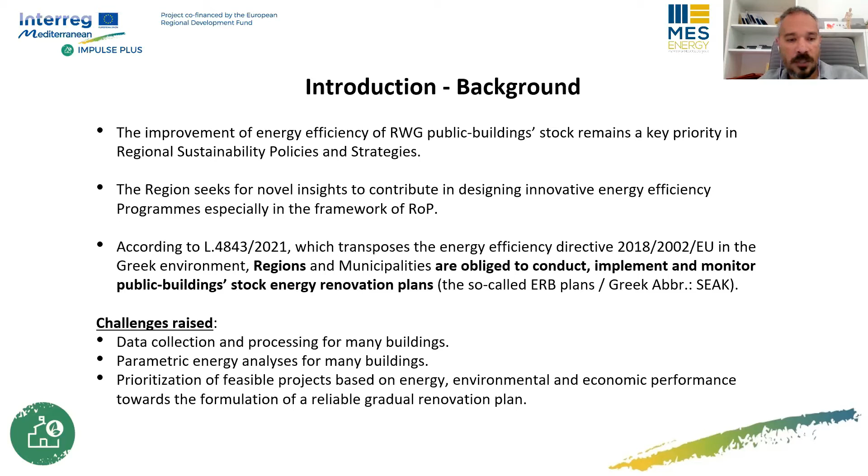Of course, one challenge is the data collection and processing for many buildings in order to conduct a reliable plan. Another challenge is to obtain reliable parametric energy analysis for many buildings in order to understand and prioritize the package of measures that we need to plan and implement projects. And of course, how to prioritize the feasible projects based on energy, environmental, and economic performance towards the formulation of a reliable gradual renovation plan.

Through exercising the Impulse Plus tools, we identified some key points that must be mentioned to demonstrate how the Impulse tools actually tackle these challenges.

So first of all, we identified the building stock in collaboration with the region. In a second step, we completed the most important data influencing building energy performance in the first tool, the public building typologies tool, which provides the library of public building typologies, and proceeded furthermore in order to classify the identified building stock into representative typologies based on common characteristics among them.

In a second step, we should decide which are the ambassador buildings, the most representative ones, in order to complete the requested ambassador sheets in the public building typologies tool.

It is inevitable that we must perform an external parametric energy analysis for each ambassador building, but keep great notice on that. You have, for example, like the previous speakers, a tremendous sample of buildings. What Impulse gives you is that you don't have to make extensive energy analysis and simulations for all your buildings.

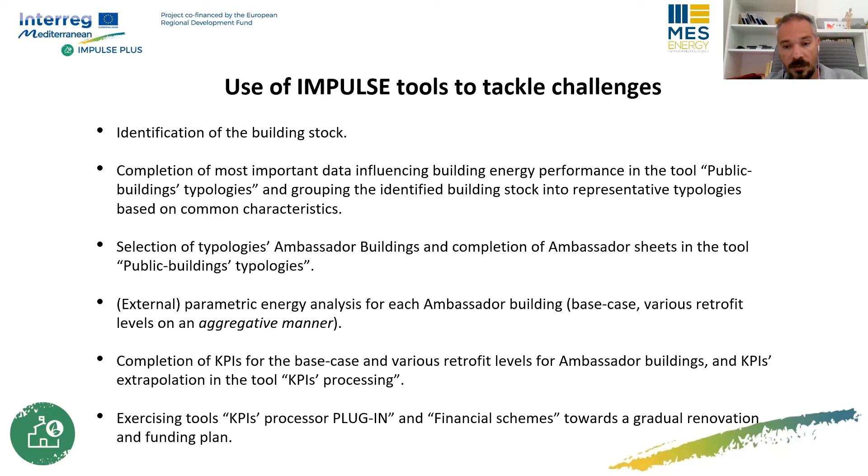And finally, we exercised the plugin, the KPIs processing plugin and the financial schemes towards a gradual renovation and financing plan. So let's see what happened. As per the directions of the region, we identified only 11 buildings, because these 11 buildings are owned or managed by the region, which is the sole responsible party for them.

The stock mainly includes office buildings, the headquarters of regional units, divisions of public hygiene, transportation and communication divisions, as well as some public vehicle technical inspection centers, the so-called KTEO in Greece - that is the Greek abbreviation.

We decided that the best classification criteria is the building use, the construction period, and the ranges adapted in relation to the regulatory framework regarding energy performance of buildings. By now everybody knows that 1979 is the milestone year, because for the first time in Greece we adopted the regulatory framework about thermal insulation and thermal protection.

Then 2010 is the next milestone year, because for the first time the Greek EPBD was introduced. The floor area was another important criterion, and of course the heating and cooling systems, with a main discretization criteria regarding the energy carrier, whether it is fossil fuel or electricity - for example, oil boiler or heat pump for the heating system, and a heat pump for the cooling system.

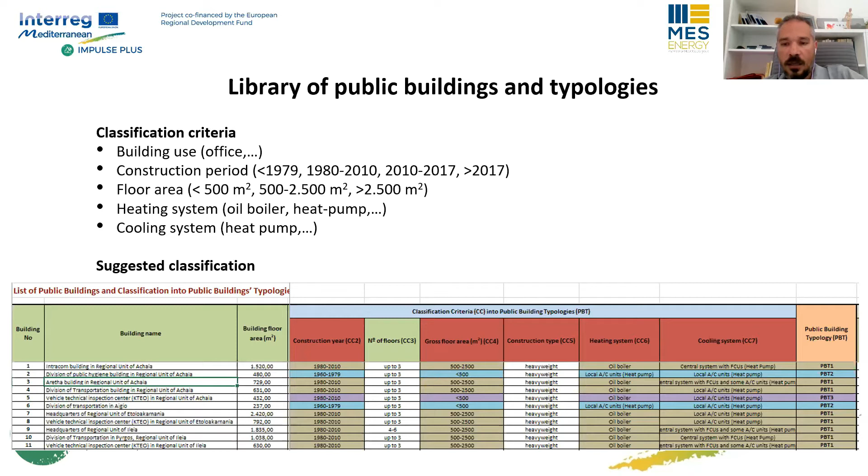In the same tool, we completed all the details of each ambassador building, just to have an energy identity of each typology as reflected by the selected ambassador building. So just a few comments.

For the first typology, we have the Vehicle Technical Inspection Center in Regional Unit of Ilia. Its use may be considered industrial, but if that's not the use introduced in administrative documentation, then I'm afraid it won't be included for funding, because forthcoming programs, such as the regional operational programs like Electra - that we are so eager for the invitation to finally be released - include mainly office, school, and hospital uses.

So we decided to concentrate on the office building units when talking about the vehicle technical inspection centers. It was much wiser to focus the study on office units. So even these buildings were handled as office units, and it's true that normally half the floor area of these facilities is office use, and the other half contains mechanical instruments that a common vehicle technical inspection center uses, with not much space for someone to do anything there. So let's consider these building units as office units as well.

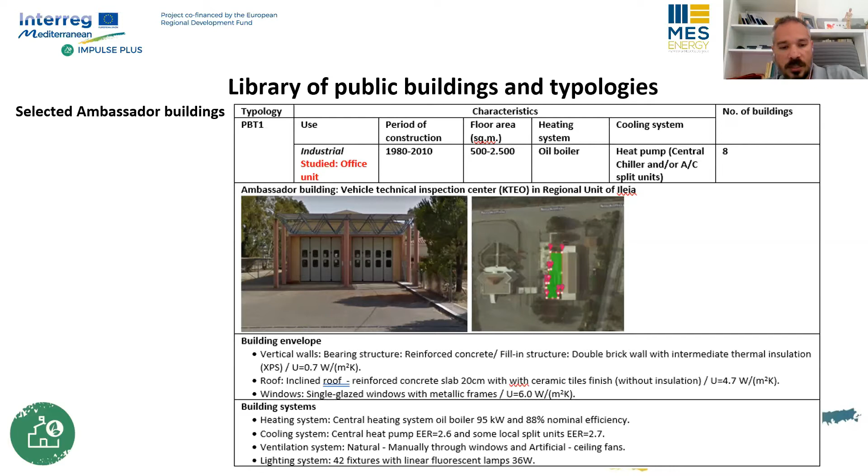You can also see the recording of the heating system: a central heating system with an oil boiler of 95 kilowatts and 88% nominal efficiency. The cooling system is a central heat pump with an energy efficiency ratio of 2.6, and other details I won't tire you with.

The second typology is reflected by the Division of Public Hygiene Building, Regional Unit of Achaia, located in the city of Patras. It reflects 2 buildings of the initial sample, and you can see the recordings regarding the main characteristics used as input conditions in the energy parametric analysis afterwards.

And finally, we have another industrial-use building, the Vehicle Technical Inspection Center in Regional Unit of Achaia, which is actually a singular typology because it includes only 1 building.

And you can see also a photograph and the location of the building, also the boundary conditions regarding the thermal U value, and the recordings about the building systems. Here we have again a central system with oil boiler, a cooling system with AC air-conditioned split units, manual natural ventilation only through openings, and linear fluorescent tubes of 18 watts in recessed ceiling luminaires.

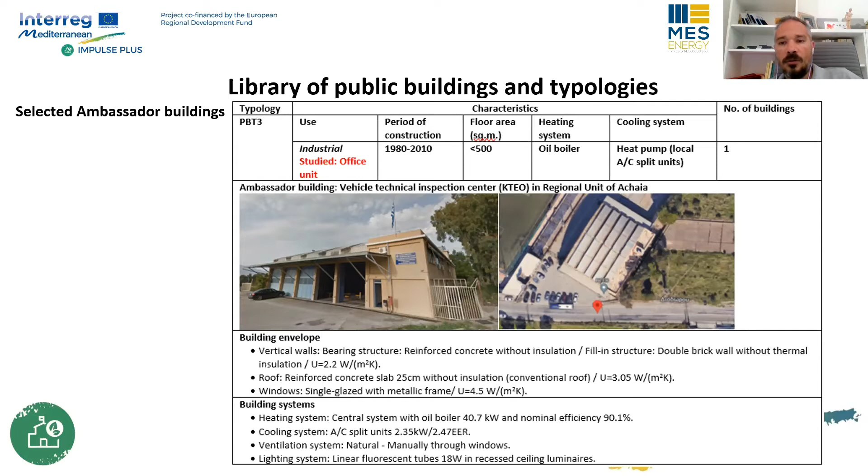Now, it is important, I forgot to say that the second typology was just recently subjected to renovation, which included the replacement of lighting systems. So you can see that we already have a LED lighting system here. We have also new double glazing with aluminum frame and air gap. The U value is 3 watts per square meter per Kelvin. So this was also a subject of renovation. And I don't know if it was something else, perhaps some new terminal units for cooling and heating.

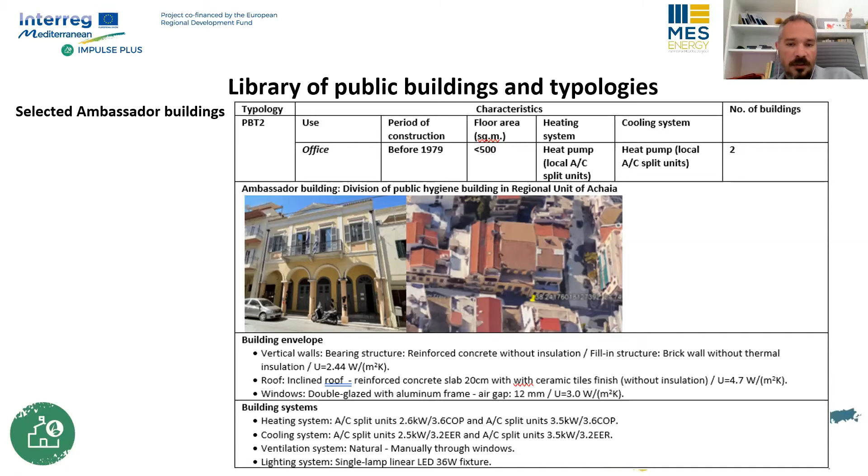So this is interesting because one considers what to do. So of course there is room for more energy saving potential, and I will demonstrate later. Regarding the energy analysis, we adopted a zonal model of quasi-steady monthly time step computation based on the EU standard EN ISO 13790. The input conditions were produced by processing the collected data based on the Greek EPBD technical directive, Energy Performance of Buildings Directive.

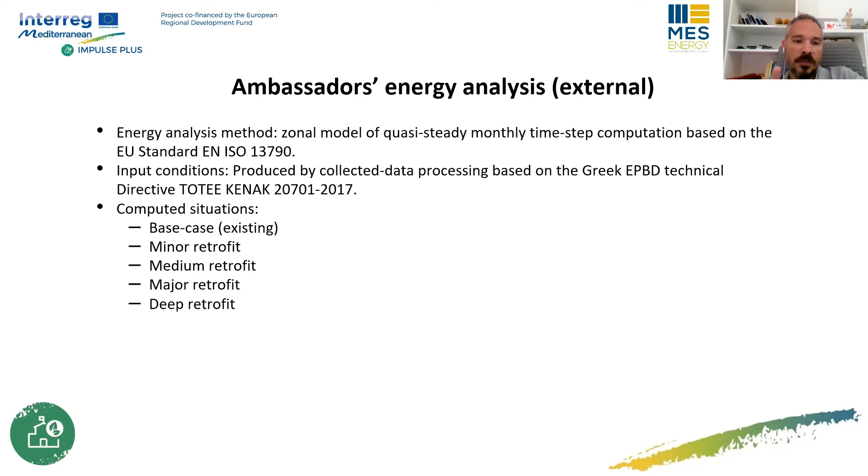And the computed situations included the base case, the existing situation of the building, the minor, the medium, the major, and the deep retrofit, ensuring always the aggregative principle, which means that the medium and major retrofits include the minor, the small scale retrofits. And as moving towards the deep renovation, it also includes all the previous ones.

And just to demonstrate in this scheme, in the small scale, we studied the simple compensation system with or without thermostatic valves of the terminal units of the heating system, replacement of lighting fixtures with LED. And I think in the second typology, we also included the replacement of window and door frames.

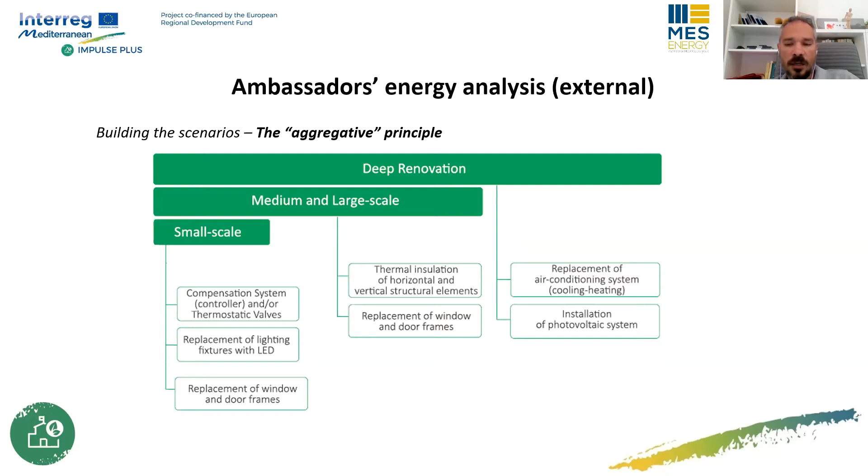In the medium and major retrofits, we ensured the thermal protection of the building, and in some cases, the enhancement of the already existing but inadequate thermal insulation recorded in the buildings, the replacement of window and door frames, and in the deep renovation, mainly we focused on the installation of renewable energy systems and mainly net metering with photovoltaic systems.

Now, you can see in this table the exact measures adopted for each retrofit level. So, for example, in the first typology, in the minor retrofit, we have the boiler compensation system and the luminaires replacement by LED. The medium retrofit includes the minor retrofit measures plus the windows replacement by PVC openings and low emittance glazing and roof insulation.

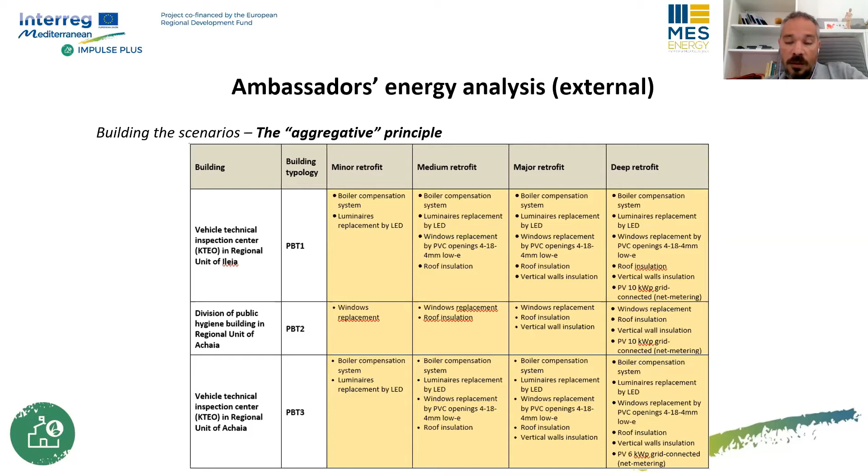In the major retrofit package, we enhanced the medium retrofit by adding vertical walls insulation. And in the deep retrofit, we added the photovoltaic of 10 kilowatts peak grid connected, ensuring the net metering mechanisms.

So we are talking about a dramatic quenching of the electricity consumption. You can see also a dramatic reduction of CO2 emissions when talking about this single ambassador building. And we elaborated a bit regarding the economic performance, because this is indeed something important that any investor always focuses on. And you can see that we have a dramatic reduction of the annual energy cost by 6 times, as moving from the base case to the deep retrofit.

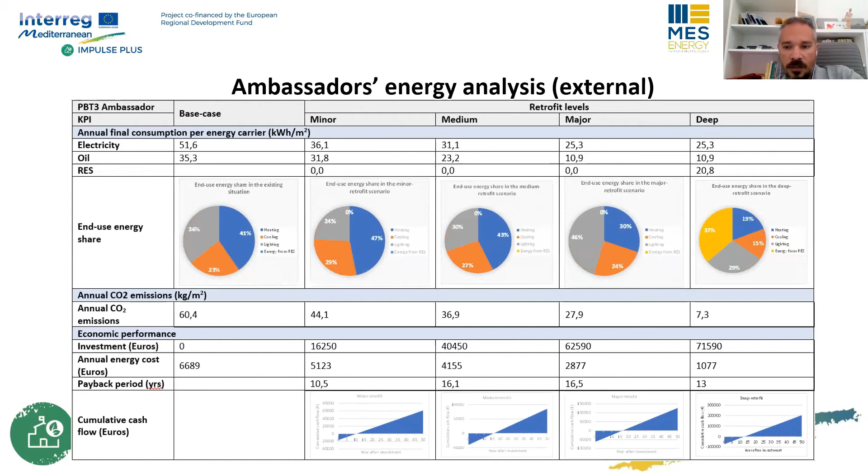Similar results for the second ambassador building and for the third ambassador building. I won't get into more details on that. We proceeded further now, having all the database produced only for 3 buildings. We inserted all the KPIs for these 3 buildings into the Impulse tool. We inserted them for the base case scenario, the minor retrofit, the medium retrofit, the major retrofit, and the deep retrofit.

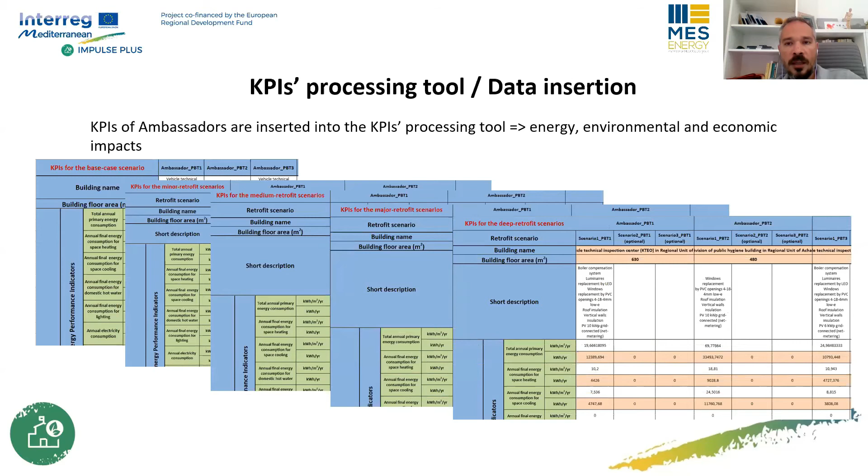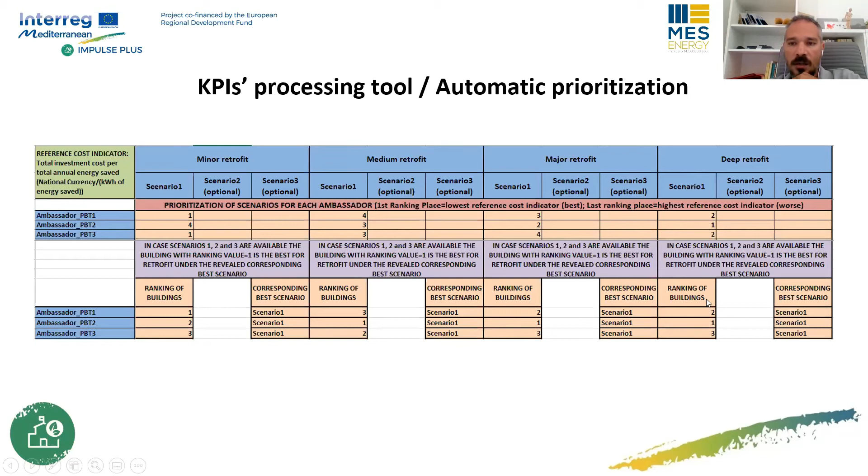And the tool itself provides, first of all, the automatic prioritization. I will insist more on the second table, where what it gives you is which building is better according to total annual energy saved. You can see that in the minor retrofit, it is better to start with the first typology, continue with the second typology, and finally with the third typology. And you can take a similar prioritization of buildings and projects for the several retrofitting levels.

Now, again, the tool automatically extrapolates the impacts for all the buildings. So here is a great result. We had KPIs only for 3 buildings, and now these are extrapolated to all the 11 buildings of the initial sample. And just indicatively, you can see that in the minor retrofit, we can achieve a reduction of total annual primary energy of about 27%.

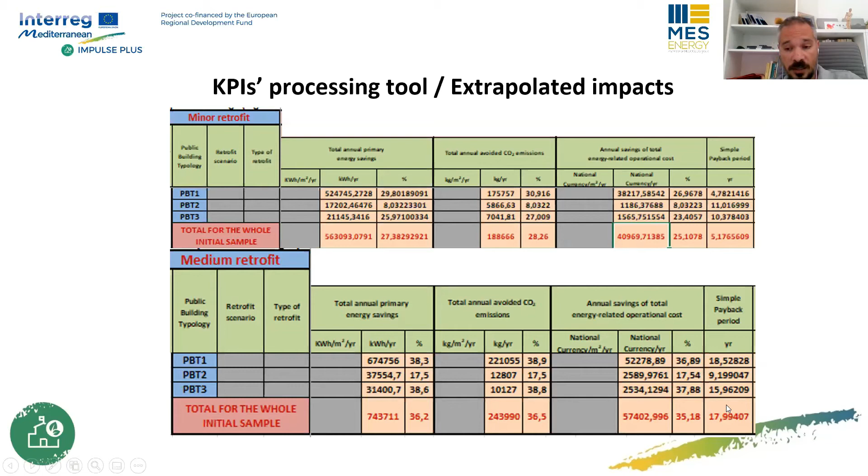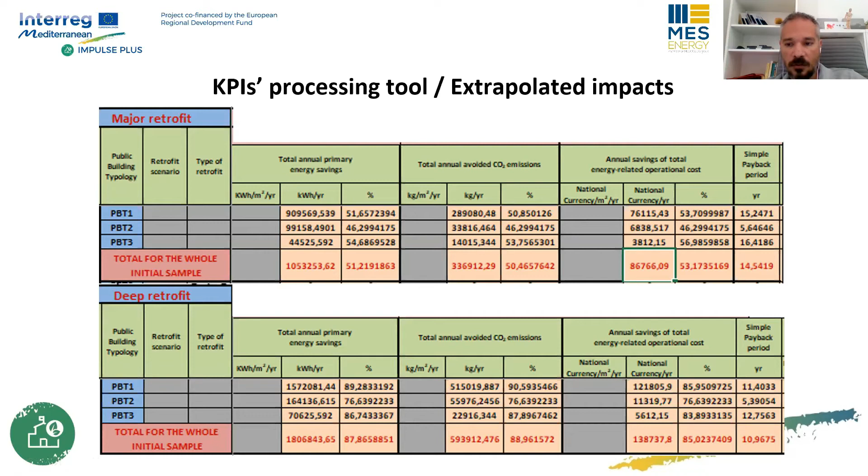This becomes 36% in the medium retrofit, but the payback period increases to a prohibitive, let's say, value, but it is healed when talking about major retrofit and especially deep retrofit, when enhancing the scenario with photovoltaic panels. And you can see the extrapolated impacts for all buildings.

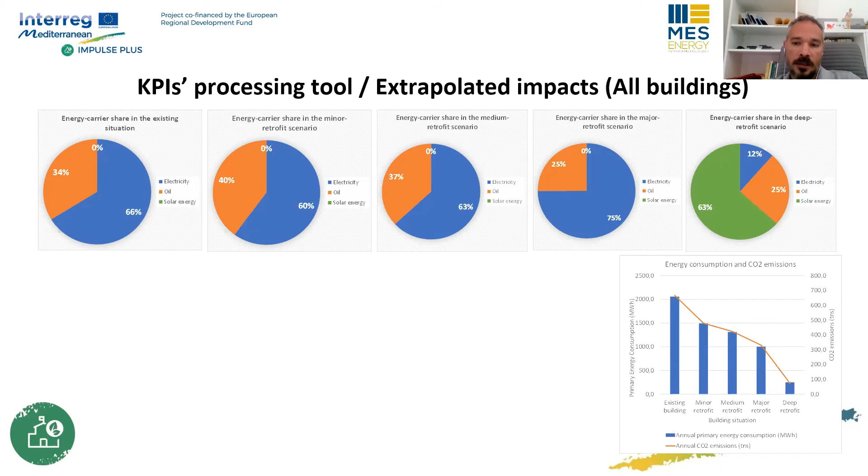Regarding the economic performance, you can see that regarding all buildings, we have a good internal rate of return, and especially for the deep retrofit, we have 8%, which is a bit higher than the inflation rates that we have right now in Greece. The situation is not so good, so it is encouraging that we have good results even under this economic crisis that we are experiencing, not only in Greece but in the whole of Europe and the Mediterranean, of course.

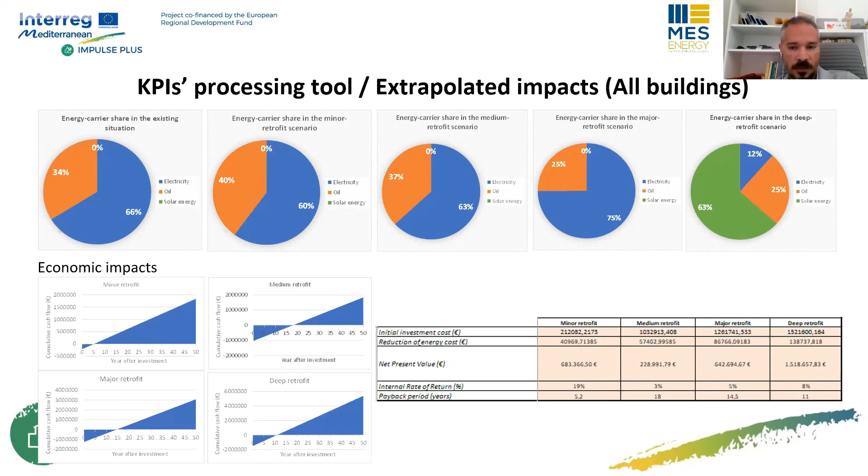So we used the KPIs processor plugin. When balancing the preferences in indicators, we gave more weight to the energy savings and the CO2 emissions avoidance, and of course to the reduction of the energy related operational costs, and less interest was paid to the investment cost and the simple payback period, because indeed we cannot deny that in Greece we will have funding for the renovation wave, and it's coming through the Electra program.

There is an increased interest, so we could assume that there will be enough money, but not grants. There will be enough money by means of loans, investment loans, because only with grants we have no hope to achieve the energy renovation of the whole public building stock in Greece. That was for sure recognized by the ministry when designing the Electra program. It was not really necessary for us to provide more penalties regarding a specific typology or a specific type of retrofit. We provided a 10% retrofitting area per year because there is much room for the region to implement that project.

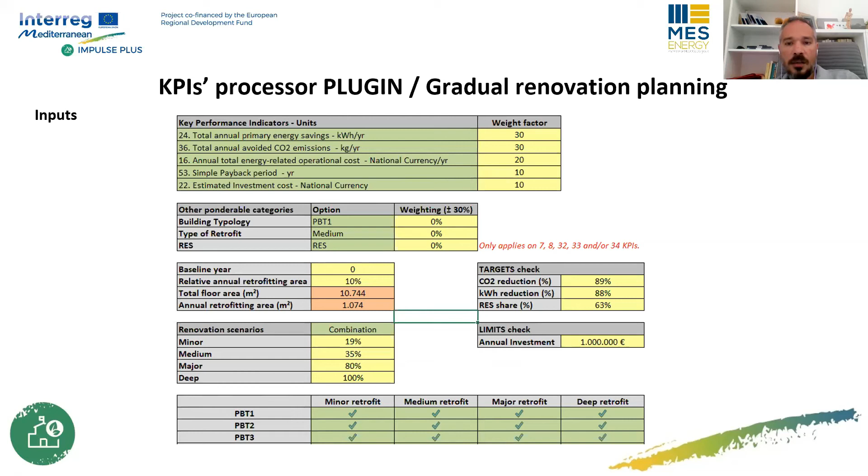We adopted as a first approach the targets coming from the second tool as upper limits, and we ensured all the combinations available were involved in shuffling all the public buildings and retrofit levels in order to have the results. So having the weights more concentrated on energy and CO2 emissions avoidance, you can see that the deep retrofit gets the greatest score in relation to the other retrofitting levels.

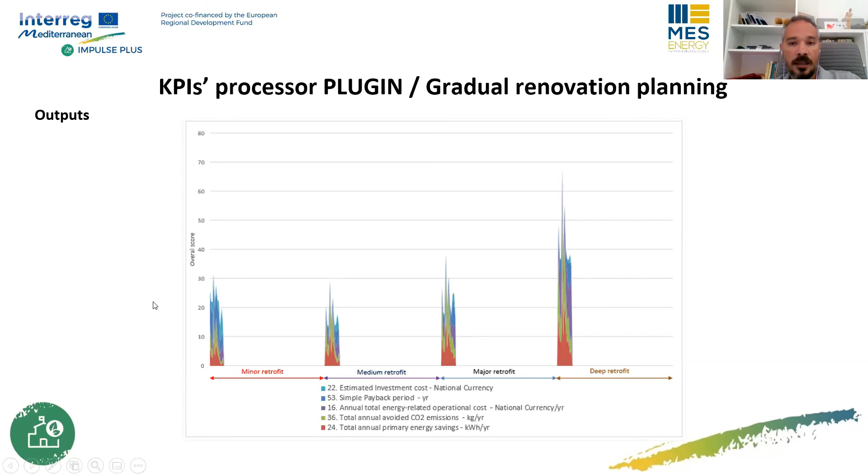That means that the plan highlights only deep retrofits, and this is acceptable for the region because the amounts of money look feasible and can be eligible in European programs, in national programs, or even in investment loans.

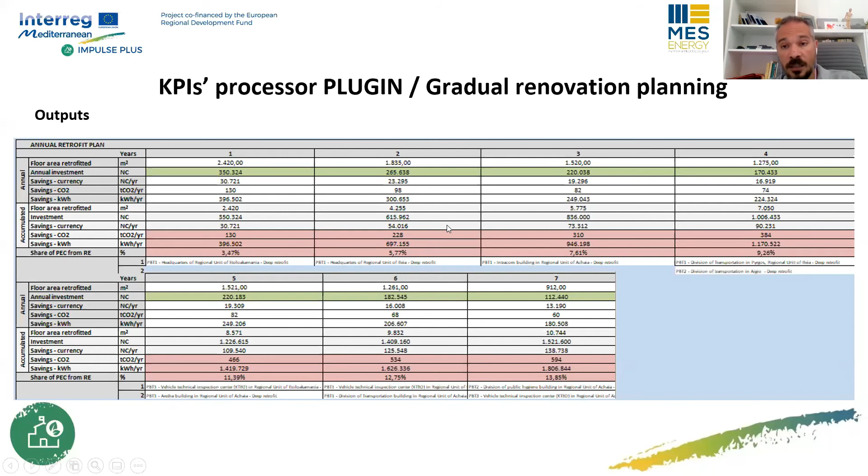So you can see here the specific buildings that are recommended from the plan, and this is again something very, very useful for regions and municipalities, because a politician won't stay to understand these graphs. They won't, but they will understand the provided pipeline of projects, what project to do in each year in the forthcoming 7 years, for example, for the region of Western Greece. So this is very informative, and it is great to have this automatically produced.

Finally, we use the financial scheme assessment. Actually, we are still in the process of fine-tuning the setup. But anyway, we adopted some realistic values regarding these assumptions here. You can see the inflation is really high right now in Greece. We adopted the 10-year loan, and here is the mixture of the amounts coming from different resources.

What we want to achieve is, as years pass, to reduce the own funds and enhance the other sources from European subsidies. As you know, the region of Western Greece is very active in participating in European projects and still seeks new collaborations to achieve these numbers here, and some national subsidies at this level. But again, these amounts are not enough to achieve what is required for this plan, which is around 1.5 million. And of course, the difference between the resources and what is required may be obtained by a loan.

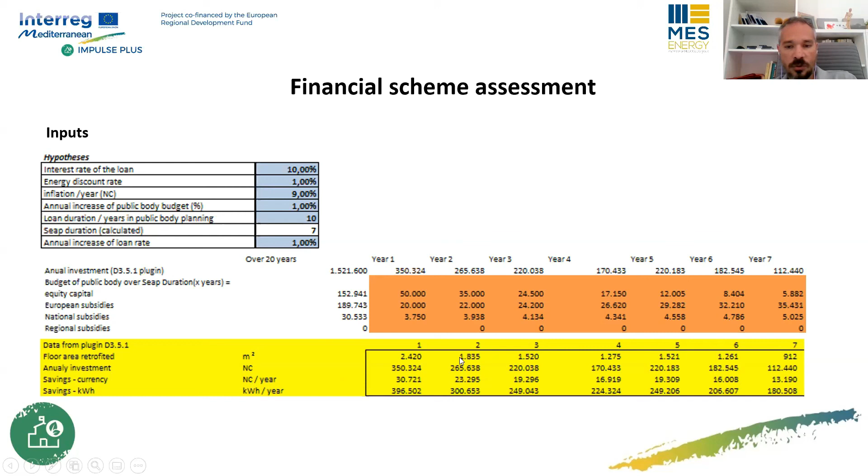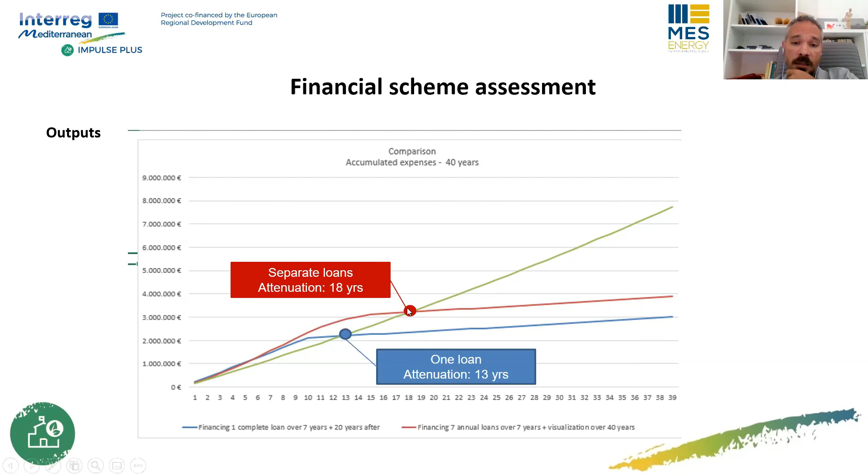And so by providing these energy and cost related indicators in the financial scheme assessment, this is what we get for the remaining amount covered by a loan. So if one compares all in one loan and different loans, you can see that with all in one loan we could have an attenuation of the loan in about 13 years, while the separate loans are not so good an option because the attenuation is obtained by 18 years, so not so attractive for the region.

Conclusions and lessons learned. So, among the tested retrofitting levels, the deep retrofit emerged as the optimal one based on the assumptions adopted in the decision-making plug-in system. A 7-year gradual renovation plan emerged, envisaging an average annual investment of around 200,000 euros, achieving around 250 megawatt hours energy savings and around 80 to 90 tons CO2 emissions avoidance per year of project implementation. The deep retrofit presents a viable investment based even on advanced financial indicators such as the internal rate of return and the net present value.

A 10-year loan covering 75% of the total investment may indeed be attenuated within 13 years, which is well below the average economic life cycle of the investments. And some lessons learned are that as a result of buildings classification and of the energy analysis required only for ambassador buildings, the IMPULSE tools tackle very effectively the limitation of high amounts of data collection and extensive, time-consuming energy analysis. Without IMPULSE, all buildings should be simulated. With IMPULSE, only some buildings are simulated and the results are extrapolated to the whole building sample.

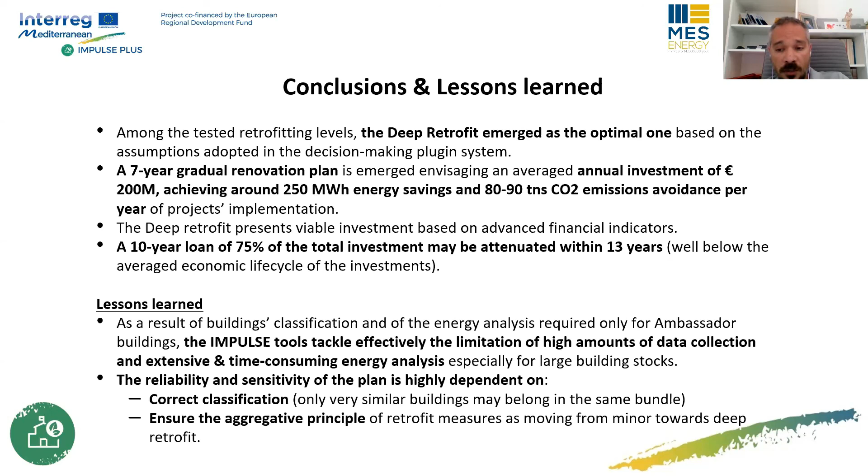It is important, and you should be very proud of the IMPULSE capitalization, at least in Greece. MES Energy supported and collaborates with the Center for Renewable Energy Sources and Saving in the framework of the horizontal project Efficient Buildings, and through that collaboration, we achieved the result that the Ministry of Environment and Energy has uploaded and recommended the IMPULSE tools as recommended tools for regions and municipalities to conduct their SECAPs, the ERB plans.